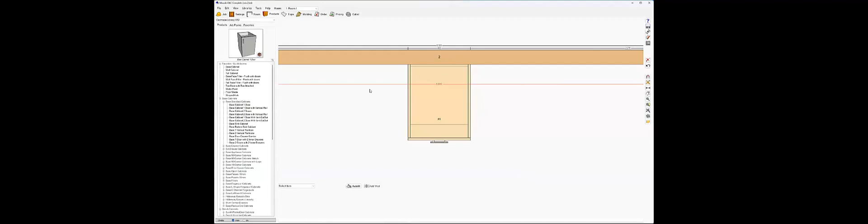While we're waiting for that, I'll go ahead and talk about these 12.1 inserts.

So if we go into libraries and inserts, you'll see in the insert library we've shared some of these things out recently. You'll see that there's now bin options for the Wesco Pull Boy and also the Hafele Hailo Euro Cargo range, brand new options we've created some nice models for. As you can see in the Antaro range, in the drop-down menu, you'll see the Blum Antaro, Wesco Pull Boy range, the Legrabox and Merivobox options. So quite a few new bin options there.

We've tried to list it out based on the cabinet size, so you'll see 300s, 400s, 450 — that's referring to the overall cabinet size you'd need to accommodate that bin. Then the capacity of the bin is written at the end of it. So the one I've got highlighted here is the 2 by 26 litre buckets, and then you've got the 2 by 32 litre buckets as well in the 450 range. So within those options you'll be able to accommodate different choices. Very easy to use.

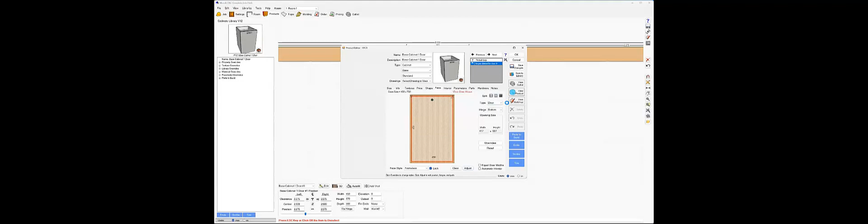If I go ahead and look at this cabinet here, I've got the cabinet set to hinged on the bottom, and then set that to a door. I've just gone into adjust and deleted my hinges, so that way I've got a handle at the top there and nothing at the moment inside the box.

What we want to do is go ahead and go to the interior, and now we can go to the inserts by clicking on the opening and clicking on inserts. You'll see you've got the bins Wesco Pull Boy range, and then you can go ahead and drag out the appropriate ones. I've got a 450 wide cabinet, so I'm going to grab the 450, 2 by 32 litre buckets, and drag and drop that in. Now that's pretty much all you would need to do at that point.

What you can see here, if we look at this in high detail mode, you'll see we've got the front bracket drilling coming through onto the back of the door face, and also the side bracket options onto the side of the cabinets. So both of those options would come through automatically.

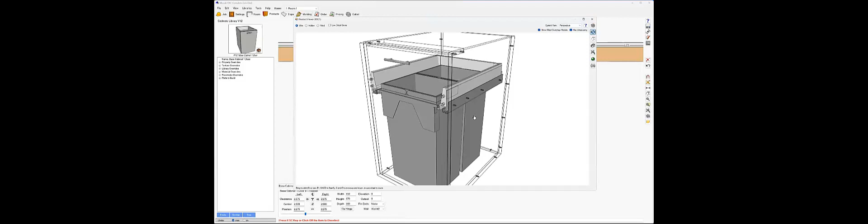Now, if you do want to lift your bin up higher to sit higher in the cabinet and have a bigger space underneath, the best way to do that would be by using an insert separator. So I'll clear this out and we'll go ahead and split the product and change that type to a separator. I can click then and nominate the amount of space I want underneath the separator — say I wanted that to be 50 millimeters, for example. I can click then, and I've got two separate insert areas that I can utilize.

In this top section here, I could go ahead and drag that product out, and what you'll see is the drilling and everything's moved up that extra 50 mil space I accommodated. So if I wanted to bump that up, you can see I've still got 67 mil top clearance above the bin drawer there. I'm going to go ahead and still move that to 100, and I would still have 17 mil of clearance above that then — that's about as high as I probably want to set that option. But that does give you those choices to run through and set that to what you're after.

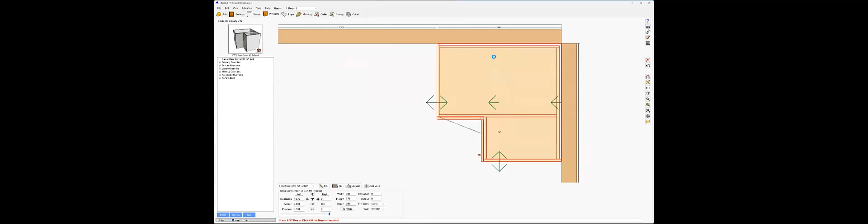I can see Mark's asked a question here about whether there's a way to add clearance to corner cabinets, both right and left walls, similar to the clearance for blind corners. I guess there's no way of nominating separate clearances if that's what you're asking. If we go ahead and look at a corner cabinet here and drag and drop a corner cabinet into the section — at the moment, as you can see, the one clearance option, if we go into the parameters, we've got the unfinished back recess — if I was to zero that out, you would see that would zero out on both sides. So it's not one or the other, it's just both sides.

In the situation, I guess, where this maybe was an invisible wall, because maybe that's going to be a return, breakfast bar or something like that, where you're going to see the other side of that. It may be a bar panel or something like that. I can understand where you're trying to achieve there.

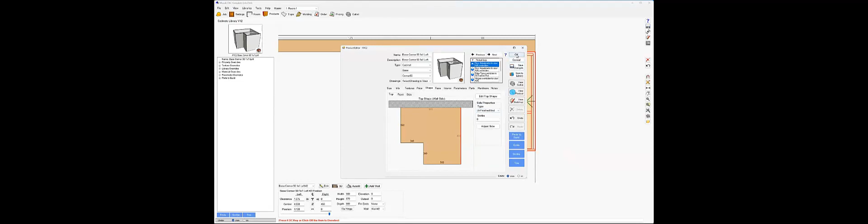So what you could probably do in that situation, if I go ahead and make this 16.5, just to bring that clearance back, you could probably change what the part type is there. So if it is a back, then we are going to get that 16 mil scribe on that back. But if we change the part type, and let's just say we make that, for example, an end, and I click OK, that's kind of one way you could roughly achieve it, because now that's classified as an end of a cabinet, not the back.

So that would be one option. You would just need to accommodate sort of how you would want that join to work then, because being an end, it's going to go all the way back to the wall. But you could click on the section there and go adjust, and then you could take off a right edge adjustment like 16.5 mil or something like that to be able to pull that back in line with the other back. And then you'd probably need to do the similar sort of thing at this end of the product as well.

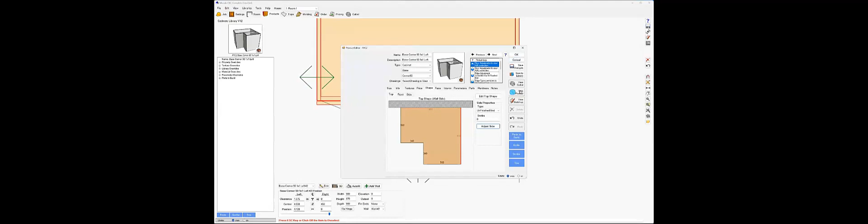So we had a look in the 3D view there. At the moment, they're both overlapping, thinking that you probably want to miter two ends together. But in this situation, same deal. You could click on this one, adjust, and then you could take your material thickness away from that edge as well. So then looking at that, you sort of come up with the right option. You've got the two ends there meeting in the back there, and that's giving you the adjustment on one side where you've still got the clearance there, but not on the breakfast bar side.

Hopefully that's kind of what you're after. Hopefully I've sort of answered that one clearly, but yeah, just drop me a comment if you want to sort of clarify any of that a little bit further.

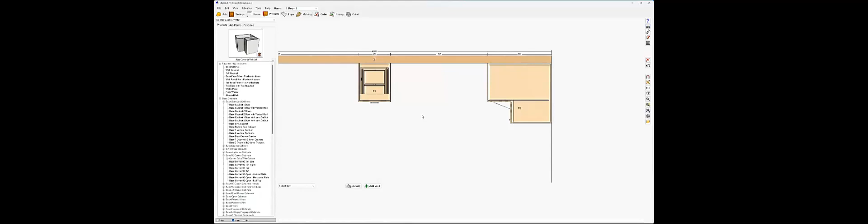So coming back to some of the other changes in 12.1, if we jump into libraries, and we're going to go down and take a look at the fasteners. So I'm going to go into the hardware library and into fasteners. One of the changes that I wanted to mention was that in the CADmate screws, one thing that you could do an update on your side would just be the drilling depth, what it's linked to.

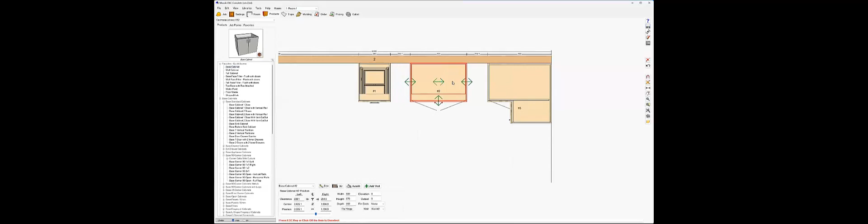Previously, this was linked to an unfinished end. So right now you can change that to part TH. So the value part TH will look up the current part thickness. So, if you do happen to change your end thicknesses, from say 16 mil on one end and something on another end, what I'm trying to point out here is I click on this one and maybe make this a finished end. And let's say then I go to my finished end and I've nominated a different material thickness.

So right now that's on 18 mil. What we'll notice in prior to 12.1 was that your screw holes were still based on the unfinished end. So they were not going deep enough on the finished end in the different material. Whereas now with that new formula, it'll reference whatever the current part is, not just a particular part type, which is really useful.

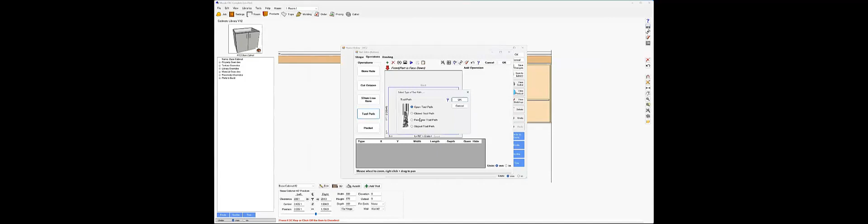That's a really useful one as well, just in general, if you were trying to add a cutout to something, like if I was to add a cutout to the bottom of this cabinet and I was to go into my edit operations, and let's just say I go ahead and I'll do a perimeter toolpath and I might just offset that in, let's say, minus 50 mil all the way around. Now, if I was wanting that to cut through, what I could do there in the depth, I could just go ahead and nominate the calculator and just type part TH. So as soon as you type part TH and you press test, it's now referring to the thickness of that part. So that part in there, it's 16.5 mil thick at the moment based on my material.

But I can go into edit there and I could change that material to something else. So for example, I'm just going to pick a 19 mil material.

And when I come back in here and go back to my edit operation, you'll see that's updated to 19 based on that current part thickness. So it's useful to know you can nominate that really easily now with part TH, just like part L for part length and part W for part width. Part TH would be the part thickness, so it's really easy to look that value up in a formula.

While we're talking about adding operations, a question came up recently. One of the people asked on Facebook about anchoring and how the anchoring system works, so I just wanted to point that out. At the moment, let's delete this one and add another in. We'll just do a closed toolpath.

Now at the moment this point here is a certain distance away from the left, right? If I was just to say I'm going to make that 100 mil, and click on this one and make that also 100 millimeters, just for nice round numbers, and do the same here - let's say 100 millimeters from the front, and the same here, 100 millimeters from that side. Now if you're trying to keep these particular points exactly 100 millimeters away from this edge, you want to make sure you change your anchoring value, because if you leave it on the middle, it's scaling as the part grows or shrinks in size.

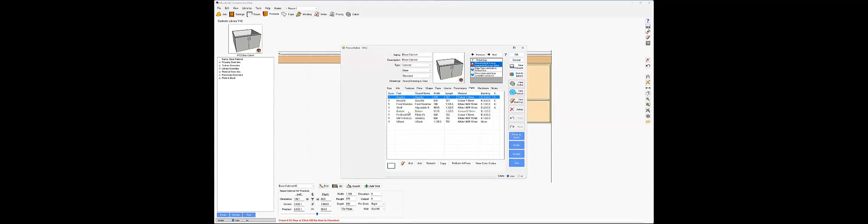So just to show you that difference again, if I now go and make that wider and deeper again, and we go back into that bottom, edit and edit operations - what's changing now is it's keeping, you can see these values, they're not 100 mil anymore, they've gone to 122. So it's scaling now with the product. It's not keeping a fixed value off the middle of the product, it's now scaling in relation to it.

So as you grow, if you were to grow that by 100%, your scale would be 100%. If you were to grow it by 50%, that would scale according to the factor of whatever percentage that was to begin with. It's much easier to understand the anchoring when you point things to the opposite corners rather than off the middle. But if you want it to scale proportionately as the product grows or shrinks, then anchoring to the middle is fine.

But if you wanted to keep fixed values, anchoring to either point is a good one to know.

Another point on the toolpaths there, when you assign a tool, say a 10 millimeter compression cutter for example, that tool is actually running around the middle of that line, which means you've got to accommodate for the tool radius, which would be on the outside of that line. So a better way, if you're trying to do a cutout rather than just assigning the tool itself, would be...

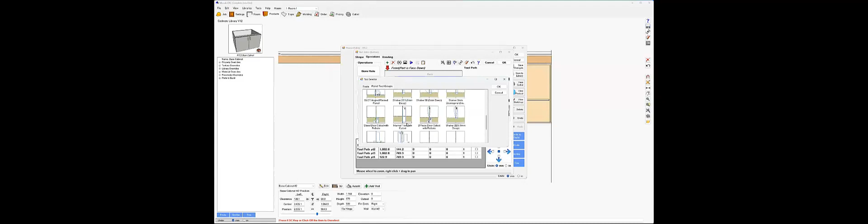...to go into your panel tool groups and have a panel tool group assigned to put an internal cutout. We've got one in our standard library there, an internal toolpath cutout, that nominates that standard 3-wing compression cutter, the 10 mil 3-wing compression cutter. Then you don't even need to nominate a depth, because that particular toolpath has the tool going straight through the material without needing to nominate a depth. So a whole bunch of different information there that you can utilize.

I think utilizing your understanding of the relationship between tools and how they apply to a line, and the toolpaths and how they apply to a line, is definitely something worth investigating and understanding, because you'll definitely find that super useful.

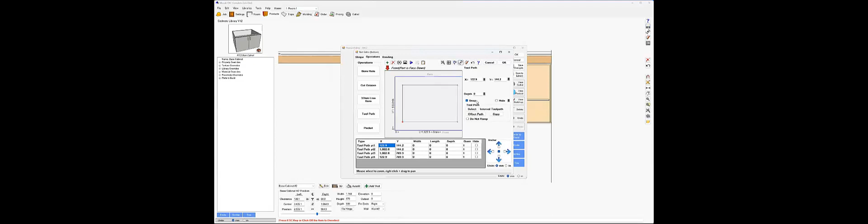Let's see, some of the other questions that came through on Facebook - Brock was asking about how to do corner pantries, the corner 45 pantries, and set the top and bottom to run over the product. I'll try and explain that one, at least my understanding of what he was asking. He was asking for L-shaped shelves too.

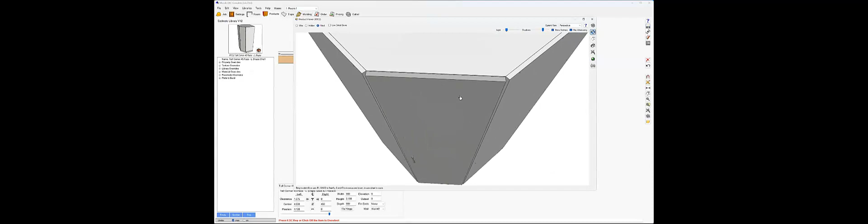So in our standard library under tall 45 corner cabinets, we do have a tall 45 face L-shaped shelf option. If we go into this product, by default, the way this one is out of the box, it's got the ends over the top, and a void at the back there, and the door is sitting between those. The door also has some adjustment values - you can see we've taken 12 mil away and we've inset the door 11.7 mil. If you're going to change all this, some of those values are going to change, and we do have the shelf shaped as well.

So within that L shape that you're after - I think what you were asking there, Brock, is that you wanted the top and the bottom of the cabinet to run over the ends and over the back. So I'll just explain how that change would look and how that would work.

We go into the parameters here. The first thing you want to do is jump into select a new parameter, and let's go down to the ends value. There's an option here that says long bottom at unfinished end, so I'm going to click OK on that one and change that to yes. I'm going to go back in there and go to the long top at unfinished end, and change that one to yes as well. I'm also going to then go into the backs area.

What we're going to look at is the relationship between the back and the top of the cabinet, and we're probably going to change that to case depth, and the relationship between the back and the bottom of the cabinet, we're probably going to change that to case depth as well. I'd probably take away my recesses at this point - you might want to leave them, up to you. But if we have a look at that now, what we've done there is we've extended the top over the ends and the top over the back to get that full top as you kind of wanted.

Now, a couple of things we'll need to do, because this was a modified part, and as you can see, this relationship here is what I'm sort of looking at fixing now.

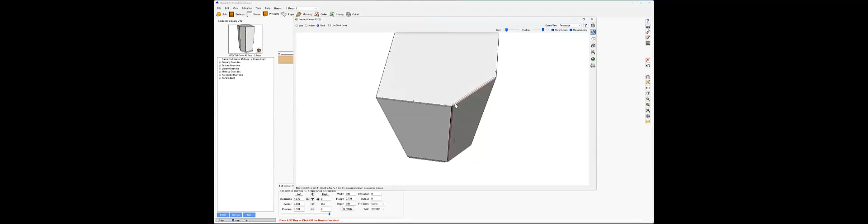Now when we go ahead and look at the 3D option here, you can see we've still got that top, the door that's inset at the moment. We can go ahead and click on the face and adjustments, and take that inset away. That way it sits forward, in the correct location there. And that's really what you're after.

You're talking about putting your top all the way over your ends and your back, and then having your door in front of that. Of course, you could probably then go in and go to the shape, and maybe you want to make that an applied door. Maybe this has got end panels on both sides, so we can just do an applied end on both ends. When we have a look at this, we can see we're getting that applied door option there. And that might change things as well, depending on how you want to build this. But yeah, there's a couple of different options.

I didn't mean to do that as a back. That should have just been an applied end. And that would get me a better result there with my shape of my cabinet.

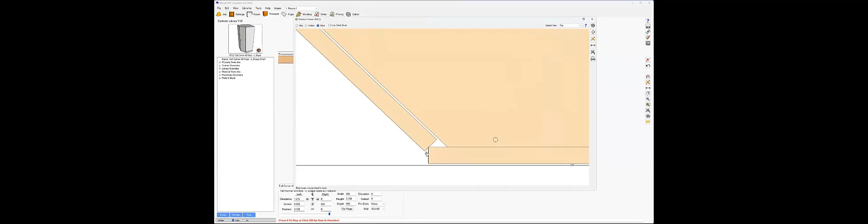And then if we look at this from a top view looking down, you'd probably want to make some adjustments to the doors and these overhangs, depending on how you wanted this to work. Some guys cut that back on an angle. Some guys would bring this out further and then drop your door back in, so your door kind of meets at that point there. And there's easy ways to do that.

You can click on that end and then go adjust, and then you've got left and right edge adjustments there. So I could go to this left edge and add 7 mil or something there. What's going to happen is that's going to shoot that end forward, and then I'll just take a bit more off that door to pull that back. So I'm trying to get those points to line up to a certain extent.

You can either click on the section of the face and adjust it here left and right, or you could go to the face, click on it and go to adjust, and then continue to adjust the amounts here. So if I wanted to take that, maybe I'd go to like -17 or something like that, left and right, and that's going to get me pretty close. I'd probably go a little bit more, maybe -19, and maybe that end can come out to 8 mil instead of 7. So you can play with your adjustments to get that looking the way you want it.

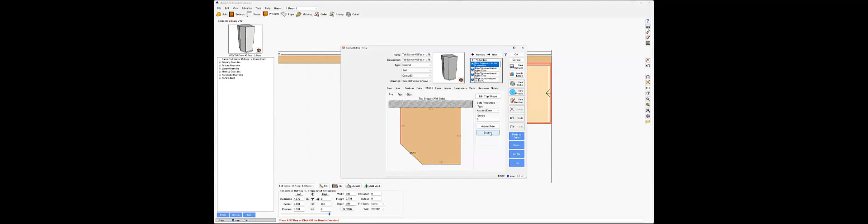It's pretty straightforward. It's just a case of building that the way that you're after. But I'll just click on and go through and put all those adjustments on there. And then once you've got that saved, you can put that back into your library. That's fully parametric, and then you've got a nice gap between the parts there. And then you've got your end panels on both sides.

So that's really probably what you're asking there. The top is over the ends of the cabinet. It's just that we've got an applied end on that now, which is totally optional. You could go back to that being just a standard side if you'd like, but hopefully that sort of covers and explains what you're after there.

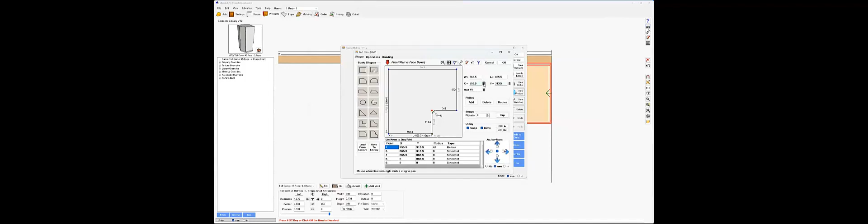The ends or the shelves have been shaped. So if you go to the shelf itself and go to edit and then edit shape, these have a custom shape on there, and they've got some parameters there that are referring to the overall side of the cabinet, and then taking away the shelf recesses and things like that. So if we look at the parameter value, if you wanted to change the depth of either of those ends, it would be by changing the left or right end depth there.

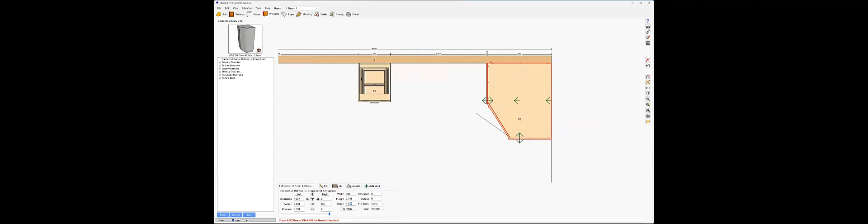As you grow that cabinet, your shelf will change with it. So say I go 1 meter this way and 1 meter that way, and go back in and look at this product in 3D, you can see all my shelves have grown appropriately with the cabinet. All those changes I made for the doors and everything have also stretched as well. Hopefully that answers your questions there.

We had a question from Matt in the States about how to update versions, like from version 10 to version 12.1. You can get your update straight from the Mozaik forum. You can log into the forum by going to your help menu and then down to Mozaik forum. You can register for the forum and download from the latest software updates area. No, you don't have to update all the different versions in between. The latest updated version for 12.1 will include all previous updates as well, so it's nice and easy.

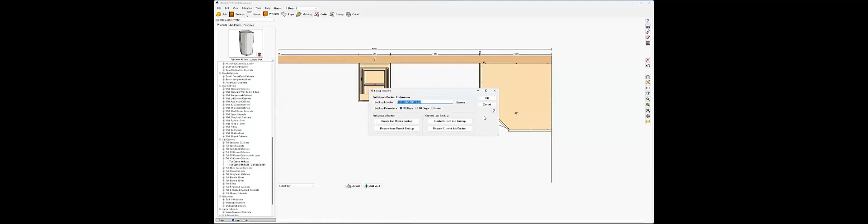All you really need to do is go to your C drive and back up your Mozaik folder, creating a full backup. Right click on that, copy and paste a full Mozaik backup folder, maybe even call it V10 backup version, and save all of that. You can also do it through Mozaik itself - go to Tools, click Backup Restore, choose a backup location, and click create a full Mozaik backup. That's another great way of doing it. It's a nice option to do that and then download the latest 12.1 update and run it. Obviously close Mozaik first, but it's fairly pain-free and easy as long as you create your backup so you can restore if needed. You should be pretty safe to jump from version 10 straight to version 12.1.

Noelle's asking if the Euro cargos are the same one here in the States. I'm not 100% sure if they're the exact same, but I believe they are, because I think all of that Hafele range comes out of Europe anyway, so they probably supply the same. You could check them out in the options we've supplied and compare. Go into inserts and come down to bins Hafele Euro. Hafele, depending on how you want to pronounce it, is just the local supplier here - that might not be the case in the States, they might come from a different provider, but the products themselves should be fairly universal.

From what I've seen, it was pretty hard to obtain the specs for these ones, but we worked through and found them. We were able to get a SketchUp model and then dimension off that model, thanks to some helpful people at Hafele. Eric's sharing the specs we've utilized too, so you can go have a look at them. Noah, you're saying Hafele is the provider over there as well. I'll get Eric to also share the SketchUp model we dimensioned these on, so you can compare the two. We've also got some screenshots in that folder that you can share in the chat, with just the dimensioned versions on them, so that way you can compare. But the model number itself should be fairly universal everywhere in the world.

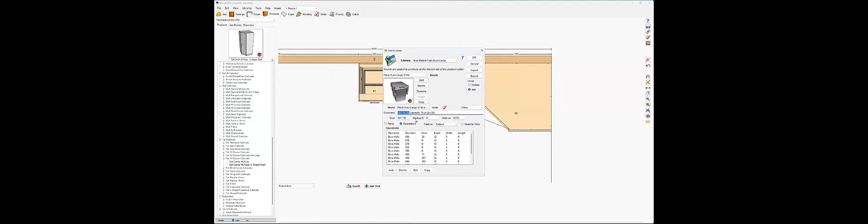Lisa's asking about the spice pullout for a 150 wide cabinet. We don't have one at the moment, but happy to add it in - we're actually in the process of adding these. The hardest thing with any of these is sourcing the actual models and getting the specs. So Lisa, if there's one in particular you're after, just send us a note to say what the actual particular one is. If you've got a link to it, that would be awesome, and we can try to get in touch with Hafele and ask if they can provide us with a 3D model, because if they can, it makes it easy for us to add that in.

We've been working with various companies to do that sort of thing too. I'll give you a bit of a preview here - hot off the press today, Jason's been working on adding in the Nova pullout range. So the Pika system, or PEKA, also popular throughout Europe as well.

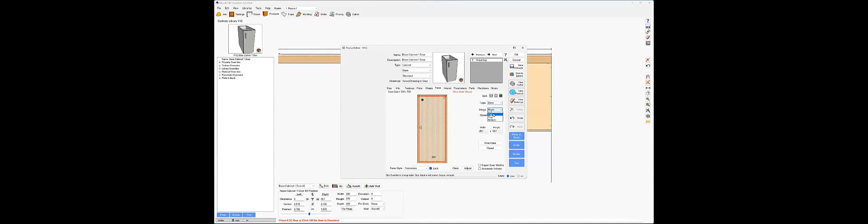We can go to clear there, and same deal, I would just set that to a door, hinged bottom, and remove my hinges to set that door up. Then when we go to inserts, we'll be releasing these as well - that's on our list to do today. So you'll see in the list here, there's a Nova Pika pullouts, and a 150, which is the 150 spice rack, I guess, from Nova.

So it's much easier now in 12.1 that we can add the front drilling. It makes this really possible for us to share so many of these things. So yeah, definitely plan on switching the Aventos and Le Mans to insert libraries as well. Nova has also been kind enough to share the Magic Corner, which is another popular one. We'll be adding that in as an insert option too.

So there's a huge list, especially bin drawers - there's a crazy amount of bin waste systems out there, and we've been trying to source everything. If anyone has suggestions on things they want added, we'll just keep working through them and sharing them as we create them. So yeah, definitely the Aventos systems.

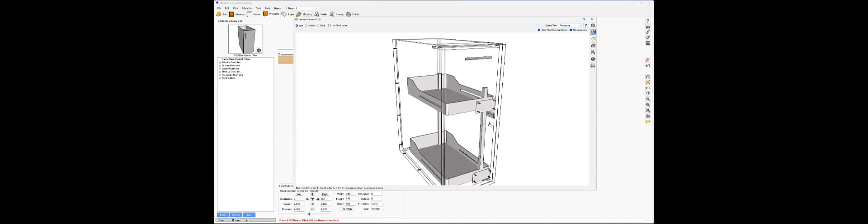Speaking to the Blum rep recently, he advised me they're recently going to be changing - there's some new Aventos systems coming out too, ones that are fully routed and embedded into the side of the product as well, so they don't take up any cabinet space. There's some nice new stuff from Blum coming, and we'll be on the front foot adding that in for sure.

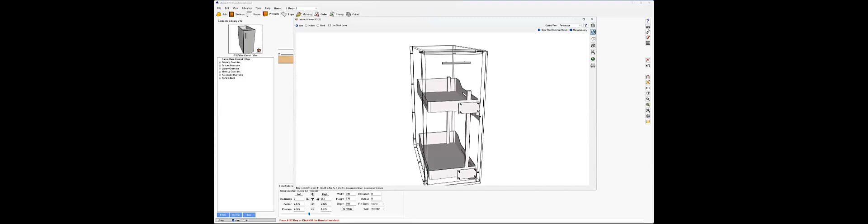Michael's asking, is there a way to bore holes in the cabinet back butt join method so they are evenly spaced - add in, remove when stretched, reduced in size. So you're talking about screwing the back into these holes here, the holes along the back edge of the product.

Because if I was to go back into base - okay, I know what you're talking about now. Let's just drag out a standard base cabinet, and I'll make this wider. So I think what you're saying is that as we get wider, we're still remaining on 3 holes as opposed to adding multiple holes at that point.

Yep, cool. So at some point, if we make that a bit smaller, 3 holes is going to be suitable, and then at some point you're probably going to want to change to 4, and at some point to 5. It's easier to add going from 3 straight to 5 than it is going from 3 to 4 and then 5, but I'll explain why.

If we jump into the fasteners area - say we go into libraries and hardware, then into the joint templates, and look at the CADmate screws method. The option we're looking at there is a joint from the bottom to the back. The factor we have to work around at the moment is that you've got options for 4 locations by default, right?

So location 1 is set 50 millimeters in from the left edge, location number 2 is set 50 millimeters in from the right edge, and location number 3 is set in the center. That's just out of the box how it works, right? Location number 4 at the moment is disabled, right?

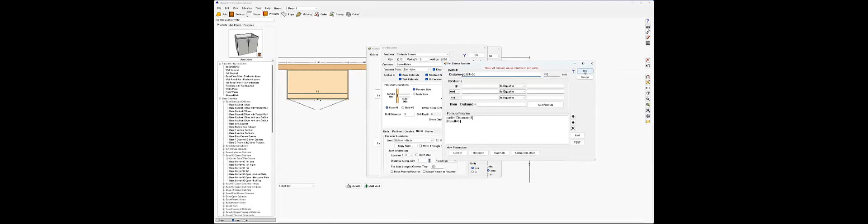Now let's just press OK there, and we'll save that and look at the change. So I open up this product. It's over 800 long, so we're going to get that extra hole. So we can see that's the one appearing here. I'd probably also want to change that to, rather than a quarter, I might want to increase that.

Brock's asking, are you going to share this? Yep, definitely, man. We'll share this out as we go. Afterwards, we'll share the recording, no problems.

So what I'm referring to there is that's the first hole that I've just added in. And we go back in here and we take a look at that formula again. And I look at the joint template and we jump into the CAD screws one and we go back to that option, and we'll go to the bottom to the back and we'll look at the fourth hole. We'll go into the formula.

Let's see if I change from part length to part width. Let's see that move. All right, so as we open this back up and go back to 3D, that now looks like it's a quarter of the way in, right? So we're referring to the width of the back as moving across this way, and the length of the back coming up this way.

So I guess the first thing you need to know is what part it's taking that option from, right? Because it's not coming from the bottom, because the bottom is the part that you would maybe think it's referring to, but it's picking that up from the back. So when we're saying part width, it's the part that it starts as. So it's a back, and I'm looking at the joint between the bottom and the back. First thing I always do before you do too much is just dive in and maybe just do one and check where it's referring to. So that way you can start on the right foot. Otherwise you sort of chase your tail the whole way through.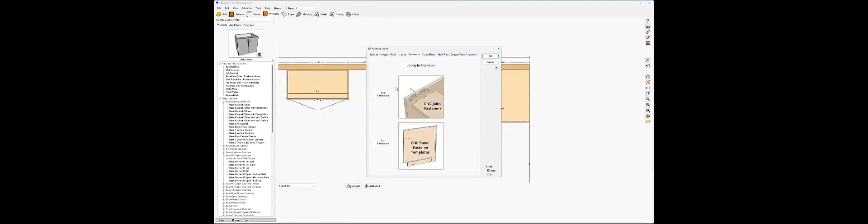So now that I've got that right, I go to libraries and hardware and back into the joint templates, and let's go to the cab screws one again, and we'll go back into the back to bottom and we'll look at the third hole.

Now the third hole is just at the moment fixed from the center, right? I'm going to change that to from left, and the distance - maybe I always want that to be on, so I don't need to say joint lengths greater than. Or maybe at a certain length, maybe like 200 long for that joint, I probably want it to go to 2 screws, so at some point I might want to turn that off, which you can easily do. But above that, I'm going to say by default, if I'm looking at making this in the center as a default rule, I'd say that same part width divided by 2.

It's not case sensitive, but I'm just in the habit of typing that in capitals in that format. Doesn't have to be though. So first of all, I've got that, and I'm putting it in the middle by default. And then I'm going to say, if the part width

was greater than or equal to a certain size - going back to that 800 value I mentioned before - then rather than it being in the middle, I want it to be the part width divided by 4 plus that 50 millimeters I wanted to bump it in to allow for the other screw.

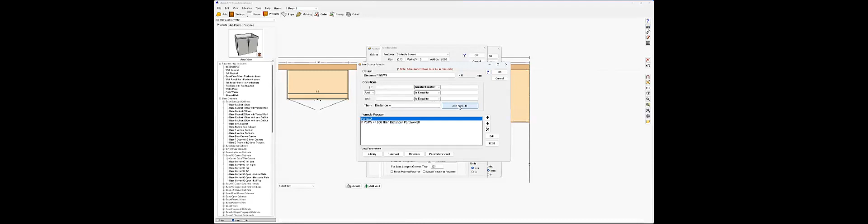So then we'll get out of there, hit okay, and jump into this one and go to the view option. Now what you'll see here is that I've got my screws in from the edge. Probably need to adjust that a little bit further to get that exactly at a quarter.

But what you'll see, as I reduce this in size, at some point in between 800, it's going to drop back to just the one hole in the middle. And then as I go over in size, I'm going to get my 4 holes. If I've reduced it right down to under 200, I'm going to get the extra one, and maybe you'd want to put another hole in the middle there. That's where you'd need to introduce another template.

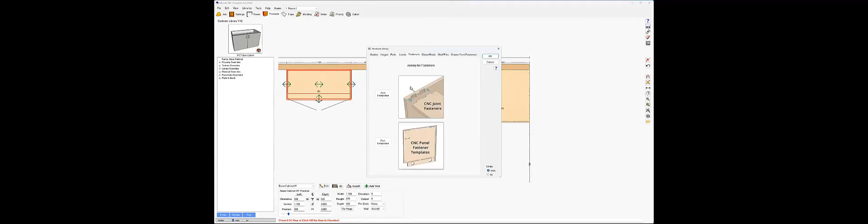So if we went into the hardware library, to go above 4, it's just extra templates. So we go into joint templates here, and if I was to look at this cab screws one - you could do a save as, but it's probably easier just to add a brand new one. But if I do a save as there, let's just call this

back holes, and we will go ahead and maybe turn all the other ones off. I'd probably go through, just so you're not doubling up with all of them, and disable all the other ones. I'm not going to waste too much time doing that now, but you can see how I'd go through and just disable everything that I don't want this to be.

And then on this particular option, now my location 1 is going to be the 5th hole, location 2 would be the 6th, location 3 would be the 7th, and location 4 would be the 8th. Same deal - I'd need to put rules as to when they turn on and where I want them to be placed. So just to show you, let's just do the first one.

Location 1, that might just be in the center, and that might only come on again when above 800 or something - maybe even more, maybe it would go to a meter when you want that to turn on. Again, you can create that rule, and I'll go ahead and say in my job parameters under the fasteners, I'm going to add that extra option on.

And then we'll go into this one here and take a look, and you'll see that we've got that extra hole. So definitely achievable, but a bit of mucking around to get it to do what you might want it to do when you start looking at adding second, third, fourth, fifth holes as you stretch the cabinet wider.

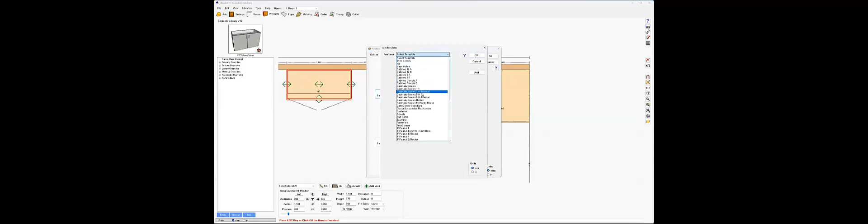Cool. You can also base that on - if you looked at our original ones, and if you don't have a copy of these, let us know - because the way we originally had these set up was the 1 to 4 and 5 to 8 methods as well. So if you were to go from cabinet screws to the 1 to 4 and 5 to 8 method, that should automatically be kind of set up to do that for you.

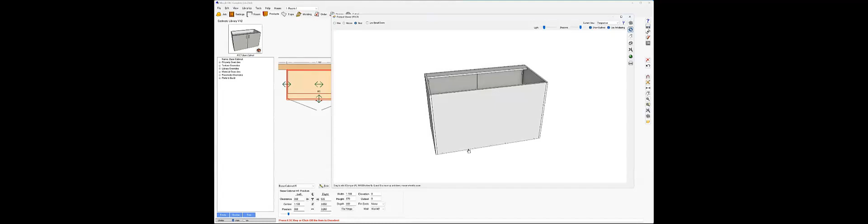So the complication here, and the reason why we moved away from it, is that it depends on whether we're picking up part length and part width based on a few factors, whether you've got internal or external backs, and other things that come into play. So depending on your construction method, that might need to be the internal option for those particular ones, and then you're going to get a different result again on the placement of those.

So yeah, there's various reasons why we kind of avoided that. I think what I'd probably like to see would be an option for us to just refer to joint length, and maybe expanding - having Mozaik expand that option out to 6 or 7 or maybe 8 or so screws that we could do per edge. That way it's a lot simpler. But at the moment, yeah, certainly achievable, but a bit of work and a bit of mucking around.

Someone asked about setting up Peanut fittings connection. Same kind of concept, really.

You're in the hardware joint fasteners area, and the Peanut options are already listed in there. I'm not overly familiar with that particular brand, but they're already set up with default settings, so you could tweak them. These do require a route, so that would be a route path that has already been created.

If there's something specific that you need to change, let us know what it is in particular that you need to adjust. But you can see you've got the adjustments there all built in, and then for them it's really just a case of nominating where you want them to be.

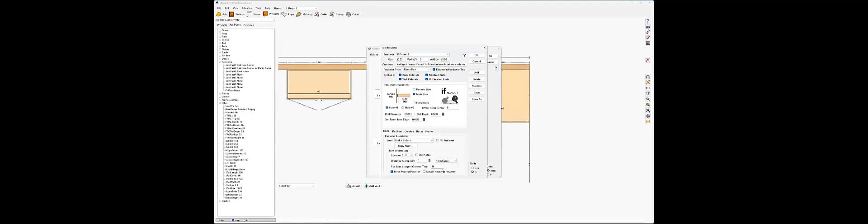If we look at the connection between a bottom and an end, it's set by default 1 inch in from the front edge, location 2 is 1 inch in from the rear edge, and location 3 is in the middle over a certain size. If I flip to inches, it's over 14 inches, it's going to turn on.

For us to utilize those, it would just be a case of nominating the appropriate one. You can see you've got a few different options there, so it would be a case of going through and turning on the options and nominating those.

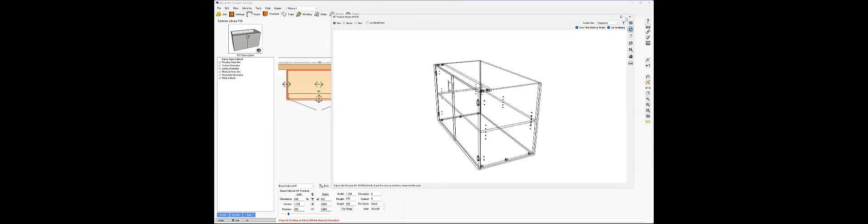That way you could utilize those, and if I was to open up this product, I've got those options there, and I can enable my high detail view just to get a clearer shot of that - you've got the hole with the route going through there. So that should work pretty well out of the box, just a case of whether or not you wanted to adjust the locations, which you can do in the hardware settings. Hopefully that clears up your question.

Has anyone else got any questions or things they'd like me to run through?

Brock asked how to add multiple runs on a closed toolpath in the operations tab if you're doing a range hood cutout. It depends on the cutout itself - it's a decent question, because it depends on how you've set up the route.

Let's go into this bottom, edit operations, and add a closed toolpath. Now if you've nominated a tool - we spoke about this earlier - if I just enter Part TH there, that's going to refer to the part thickness. If I was to nominate just a tool, say this 10 mil 3-wing cutter, then what comes into play is the values for that tool.

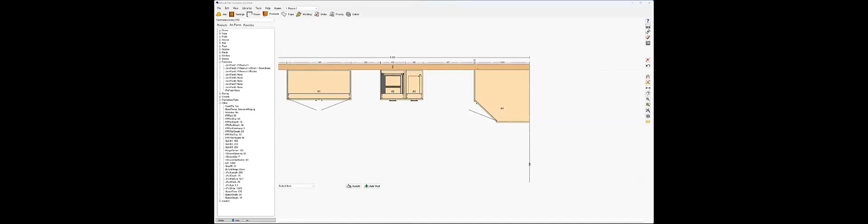Let's go into the optimizer - I'll just change my sharing settings here so you guys can see that. In the optimizer, if I go into Libraries and CNC Tooling and click on that tool, you do have a pass depth value.

If you wanted to do that cutout in increments of 5 millimeters, you could nominate 5 millimeters as your pass depth. Keep in mind, if you're using that tool for other things like cutting the parts out, that same pass depth is going to apply everywhere you're using that tool, regardless of whether it's a cutout or an operation like you're talking about here.

So that's one way you could approach it - you could nominate your pass depth, and that will automatically do it in increments of 5 until it gets down to the appropriate thickness. So for a 16.5 mil part, it would go 5, 10, 15, and then 16.8 in this case, because I've got a 0.3 value added to my through cut.

However, if I didn't want to affect my standard cutout and I wanted this to be 20 mil or something like that, whatever I wanted it set to, then I would do it instead as a panel tool group.

So if I looked at the internal cutout option, and this is probably what's by default assigned to your range hood cutout, that way you don't have to factor in the tool radius into anything.

If we come down to the depth value here, at the moment this is a through cut. So this is just straight away going to go all the way through.

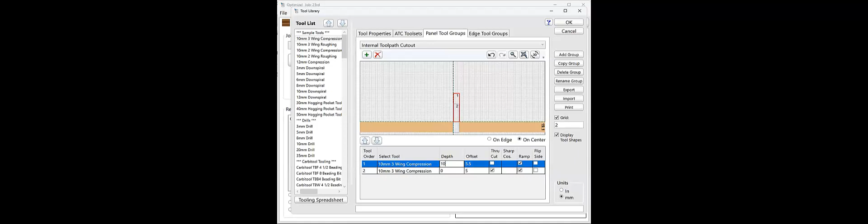Now if you wanted to do that in increments, what you could do here is just add another tool to this one. And I'd probably list that one first, and do the same thing. I'd have the same offset, or maybe go a touch oversized on the first one, maybe 5.5. And then the depth, instead of a through cut, maybe go down 10 mil deep on the first one, or 15 mil deep. Again, I can nominate what I want that to be.

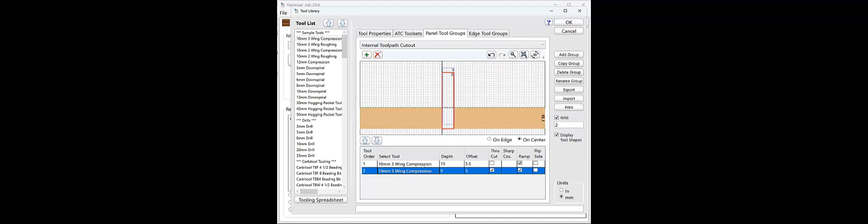But what I'm basically doing there is nominating that this particular tool is going to be first. So the order of the tool is important. That one's going to be first, going down 15 mil deep at an offset of 5.5 millimeters. And then we're coming in with the cutout tool. So just by adding those extra tools in, and you can have as many tools in that tool group as you like, you could achieve it.

So that would probably be the easiest way to go about it, I would say. Because then in your tool path, all you would need to do is nominate that particular panel tool group, and the rest of it would be automatic from there. So you just go into your panel tool group and nominate that internal cutout option, and now that's got the two tools as part of that panel tool group. That way, anywhere it's assigned, it's going to do that automatically without you thinking about it.

Michael's saying, I'm still in version 10, but the range hood cabinet parameters doesn't have an option for cutout from edge, whereas under panels it has been. Has this been updated on version 12?

Pretty sure Jason has gone through and updated that. Yeah, Jason's just clarifying that now - we updated that in version 11 and 12.

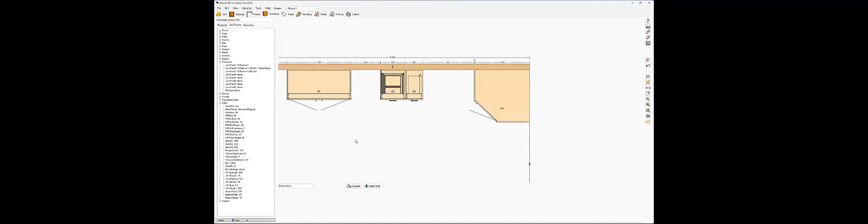So if I was just to go into products there and drag out a range hood cabinet, we have expanded that range hood cabinet range as well in version 12 too. So you've got your standard range hood cabinet. And if I was just to show you, that's the sort of one you've probably been using.

You've got the option to shift those cutouts. We've also made the duct box auto center unless you specify otherwise. But we've also added in ones here that have a division, so there's ones that have divisions where the hinges can slide inside that division. And then there's ones with cutouts as well.

So just to show you that one a little bit clearer, if I open that up - what I'm talking about here is we've got a front panel over this and then a cutout around the hinge, with parameters where you can control the size of that cutout and then the location of the cutout.

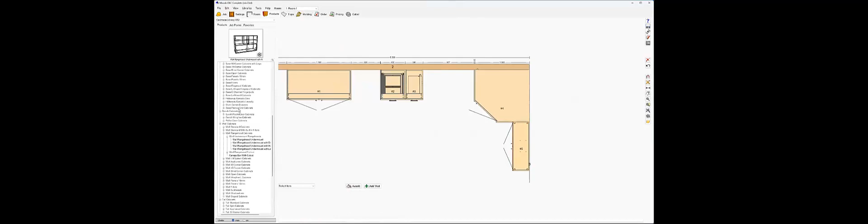So definitely worth updating to the latest version 12 library - a lot of things to take advantage of there, as I mentioned. And then we've got a different range for the pullouts as well, same kind of thing, the pullout but with a duct box too. So a few options in there to take advantage of for sure.

Some of the other questions that came through, we had Matt also asking about how to do a refacing job. Probably like what we try to do with the version 12 library of Mozaik as well is add in some refacing options.

So the way these are designed to work, you can drag and drop, assuming this is going to be hinged on the left, and then you could set your width and height. So like if I could say that I wanted this to be 1900 high or something, and then 500 wide, you would nominate your sizes, and you can go into that product and go to the parameters tab.

What we've tried to do here is make it easy for you to nominate these hinge locations. So I've got that at 100 mil, but you might go 96 or something to stick to that system 32 for your top and bottom hinge.

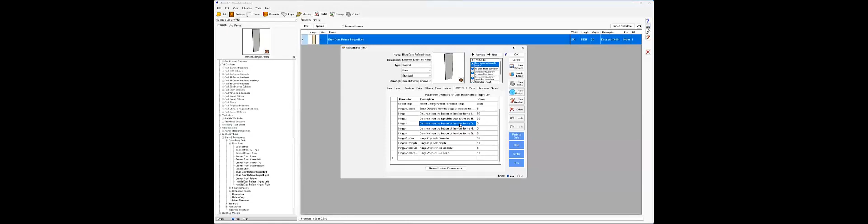Your third, fourth and fifth hinge are all based on the distance from the bottom of the door. So just to show you this in 3D, I'll stack these side by side so you can see it a bit clearer. As I add the third one in, let's say I want that at 700 mil from the bottom, I can nominate that amount. Next one, I might want 1400 from the bottom. And then I've got my hinges, because refaces are pretty much based around that, where you'd just be taking a measurement based on the door you're refacing.

So you don't typically want them centered or anything like that. It's really just you're measuring it and you're saying, from here to here, it's this size, just do that. That's kind of the way we've designed these products to work. You can change your cup hole diameter and depth, and your anchor diameter and depth, so you've got options there to make that nice and easy.

And then you've also got the same option for your drawer fronts. Rather than trying to make these overcomplicated, we tried to do this the same kind of thing, where you could specify how far in is it from the edge. So your first reference is saying, okay, from the edge across, how far is that? It's at 48 millimeters at the moment.

Let's just make it 100 to see that clearly shift. So you can nominate what you want that to be from the left and from the right, giving you control either way, so you can measure the drawer front you're refacing. And then your distance between your first hole - that's how far up from the bottom of the draw to the first hole. That would be the first thing you'd measure, and if you nominated that at 30 millimeters, for example, then that's what that is.

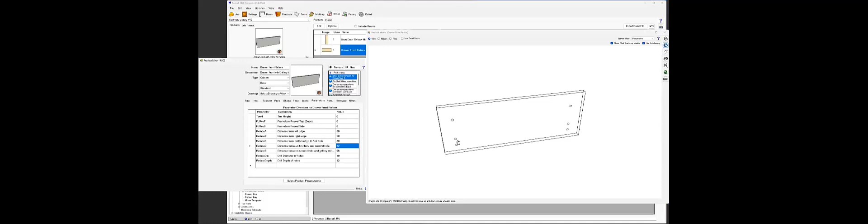You could also make this work on inches as well, so you could just go in there and type inches too. So if it was 2 inches off the left and 2 inches off the right, and maybe an inch and a half off the bottom, and then the distance between the holes - again, for most of these metal-sided systems they're typically based on system 32, so most of those are going to be like 32 millimeters, for example, and then 96 millimeters for the next hole.

And if you don't want that option, you can just set that to 0 and that hole will turn off - so if your drawer front wasn't high enough to support the gallery, you could just turn that one off, and that's nice and easy too. And again, whatever the diameter and depth of those holes are, you can go through and nominate those. But that's a pretty easy way to do reface jobs, where you can just nominate the overall size and drag and drop your products onto the order entry page.

So hopefully that will clarify that one for you, Matt. You also had another question about how you could create some sample doors for certain sizes.

You could use the same kind of order entry, but maybe you'd just go into your door list here, because if I wanted to make a shaker door sample size - and I think you were asking how that would be in inches - so I'd probably say, you said 12 by 12, so I'd go 12 by 12, and that's my sample shaker door. And then I could just go ahead and drag out whatever other door design I wanted and nominate that.

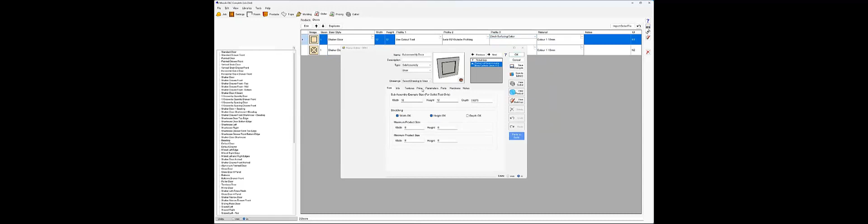You've got then your profile options across here, so you can go through and say, okay, what outside edge profiling tool you're nominating, or what inside edge pocketing tool you're nominating. So you can go through and settle your tools there as well. But you can also double click on that and go into the options here and nominate these things as well.

Otherwise, you could set that for the job and have it read from the job settings. Heaps of options there. You could also double click on those, or right click and go edit properties. And then I'm changing both of these at the same time.

So if I just wanted to say this was my pocketing tool, I could do that. I could nominate a pocketing tool, and then it changes across the board. So you could go through and have as many of these as you want, and then route them out, and that way you've got 6 or 7 sample doors that you could display for your customers.

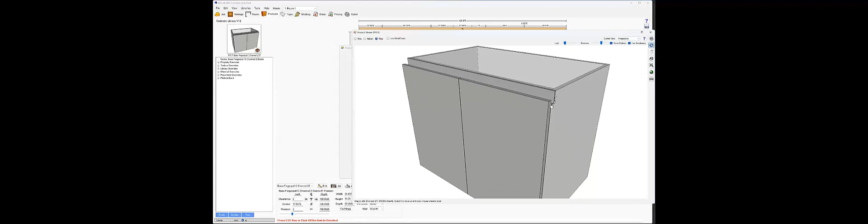Partitions on Gola cabinets. Gola is, for everyone else watching, the US version of what we call finger pull over here. So if I was to look at a product, let's drag out what we've got in our standard cabinet library - the base finger pull cabinet range. We've also got the C channel, which is probably closer to Gola because it's based on aluminium extrusion. Let's go into the product here - you can see we've got that aluminium extrusion, which would be the Gola option.

So I think what you're asking, Noel, is about if you wanted to drop a partition in there, how would that interact with that Gola range. We tend to avoid doing custom parameters for various reasons - we'd like the customers to have more control over products at part level, so we tend to just leave it as custom shapes.

So what I'd probably say to do is go into the partition, go to edit shape, and go to the load from library option. We do have a range in our library called the finger pull ends. Even though they're designed for left ends with various different sizes, I could grab that C finger pull left end option and that applies the cutout for me - that's probably the easiest way. As you can see, it's gone to the back because I grabbed the left hand, so I'd actually need to grab a right hand end in that scenario.

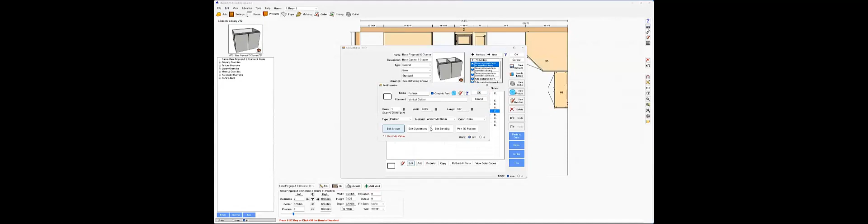So we go back in and load from library. Something to note there, Jason - we could probably add those in as a partition option too, would be pretty useful, just a copy of those but made to work with just the right hand end. A little bit confusing to know which one you're grabbing, but if we open that up, you can see I've got that cutout running around the partition, so that works really nicely. It's just a case of loading up that saved part shape, and from there you're just building your product out as you need it.

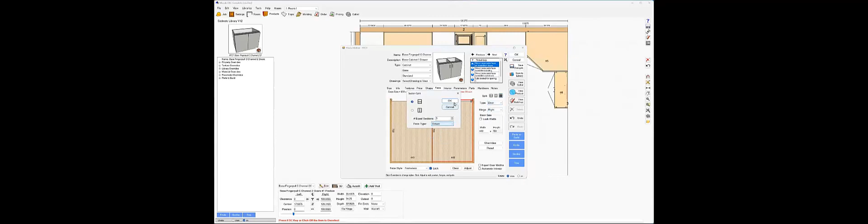So if you wanted to split that and this side was going to be a set of drawers or something like that, you can go ahead and build that nice and easy. You've got your Gola or finger pull cutout wrapping around that rail. Yeah, that would be the way I'd probably approach that one.

And you could adjust that too - like if you needed that to run up, you could definitely adjust it, because at the moment there's nothing above it. So I can click on that and go adjust part, go to my top edge there, and maybe add that 16.5 mil that it thinks it needs to drop down by the top thickness. That way I get that spot on and running up to the right spot. So yeah, that's how I'd go about that.

Can you show us how to make this panel groove parametric? Is that the back, like the back of a cabinet, for horizontal grooving? That's a good point.

We could certainly add in a horizontal version of our V groove door. That would probably be a good suggestion, because if I just make a tall cabinet, for example, let's go into the product library and grab a tall product. I'll make that a little bit wider.

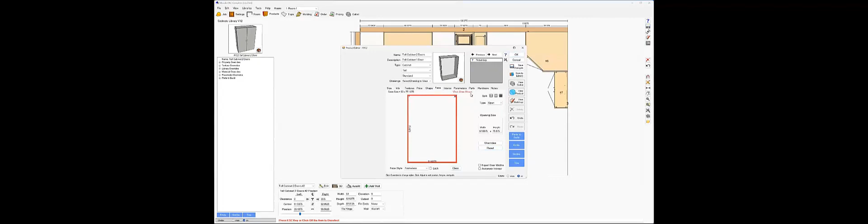Maybe you're going to split this into sections. So if I just reset this, maybe you're going to have a top section there that's in inches. I'll flick back to millimeters, more familiar, but go ahead and nominate that.

Maybe that's going to be a pair of doors. And then down here, we can split that. At the bottom, it looks like you've got maybe a couple of drawers or another pair of doors, and that's a lower height section as well. This middle section here is going to be open. Down here, I can split that into a couple of drawers or something like that.

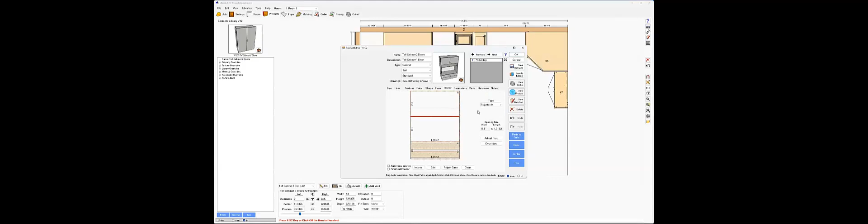Then you might want to go into your interior and start building that out, so you might come down here and make that a fixed shelf and center it, or flush it to the top of the lower section. Same deal up here, you might grab that and make it fixed, then flush that to the bottom of that next opening.

You might put a division and some shelves up there, whatever you wanted in those sections. But come into what that is at the back there. If you're trying to open that up, again, you might not have an end on it, and it looks like you don't in this section. There's various things you can do there to build that.

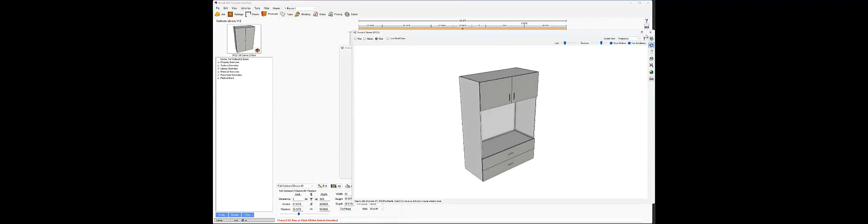But what I'm getting at is if you wanted a particular product on the back, you could insert a door, or you could add in the lines. In this situation, it would just be going to toolpath, open toolpath, deleting points 3 and 4, then having these points at wherever you wanted to start and end, nominating the depth of your groove and what groove tool you wanted to use. Choose the appropriate tool, that's your first line, then repeat for as many lines as you need.

So you could do that on a product like this. But I think you've raised a good point that if we looked at a door, if you wanted to make that nice and easy from a vertical groove perspective, we could add that in as an option as a horizontal choice. So we'll make a note of that and see what we can do there.

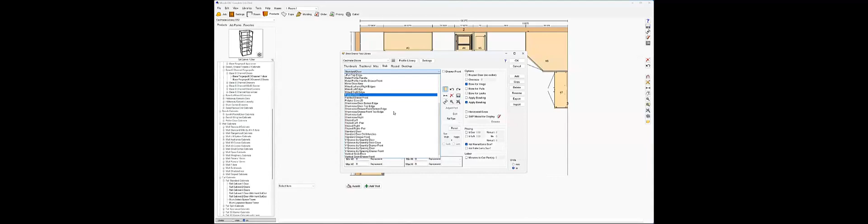Because if we look under the slab category, we've got the V-groove doors by quantity. These are options where, as I choose that door design, I can choose how many grooves I want, and we could make an option for a horizontal version of that. That way you could just drag and drop a panel in that situation too.

If it wasn't like that and I had separate products, then what I could do is go to my base bar back panel. I'd probably come down and grab a base panel, and look at a bar back panel. This particular one, again, we can position wherever we like, and our elevation can be at whatever position we need it to be at.

So I'm in inches again, let me change that, it keeps messing me up. Let's go ahead and set that elevation to 800. What I'm getting at here is that now with this one, we could go ahead and choose the door style for the V groove by quantity, and then on the parameters, you could choose the amount of grooves that you needed.

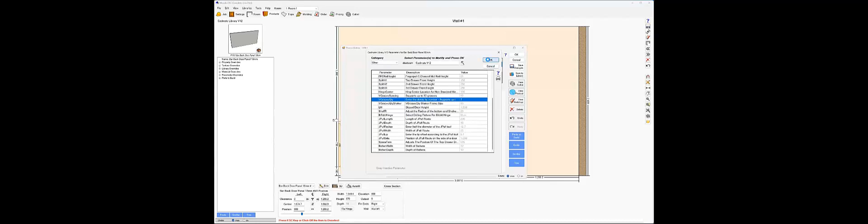So in this case, if I go into the other folder and come down to the V groove by quantity, I've got 7 grooves there. If I made that sort of 14 grooves, then I've got an adequate amount of grooves for that panel. And that would just be what you're displaying at the back there.

What I'm suggesting we do on our side would be to provide a version that can be horizontal rather than vertical. I guess you could always rotate that around, but I think it would be simpler if we approach it and set that up. So we'll make a note of that one. Thanks for bringing that to our attention, Suki.

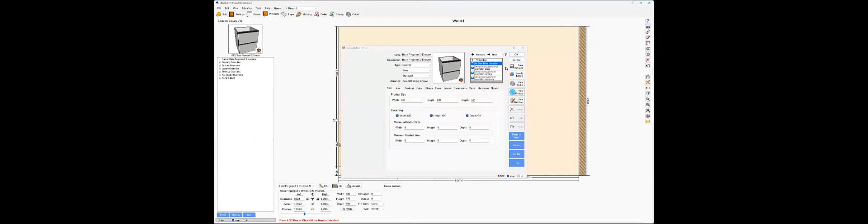Let's minimize all this. Let's take a 2 drawer. Does look like it has the ends to the floor. Actually, I've got the lines coming through on that one. Anyway, so I think what's probably changed there is that this has been maybe set to a frameless inset option.

So that way now the doors are inset inside of the options. So at the moment, you could do that, and then you would have to adjust your drawers, your reveals as well. Like if I wanted to shift the top down, I could go to adjust there, and then maybe take a minus value on that top one to bring that down, and then same deal here, just to sit that underneath the rail. But then that way you could get that sitting in the right sort of perspective.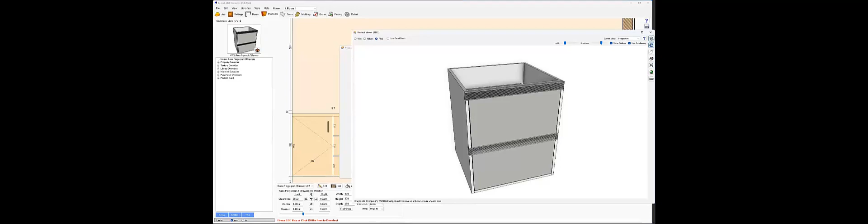It also looks like on that photo that they've got a solid end panel between each cabinet as well. So you might just draw one product and then drag a panel out of the library to have that solid panel between each one too. You could come down to the end panels and drag out the appropriate thickness one and drop that in between, then stack the next cabinet and do it that way. That's kind of how it looks like it's built to me, but it is pretty hard to tell from one photo.

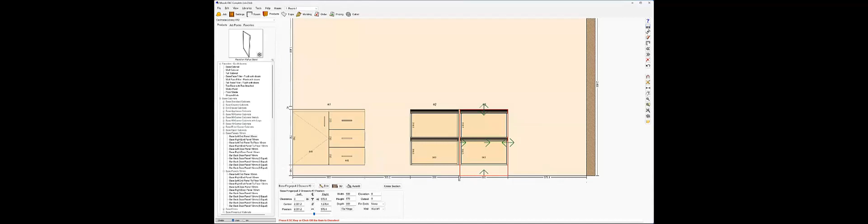Okay, so then Adrian said, how do I make a CNC tool profile to use the 1/4" compression cutter to cut out board, e.g. cut out drawers with grain matching above? So what you're saying there is that you're wanting to do your drawer fronts as one drawer, but use a smaller tool, or just stack the drawer fronts on top of each other and use that particular cutter. I think that's what you're asking there. So let's take a look.

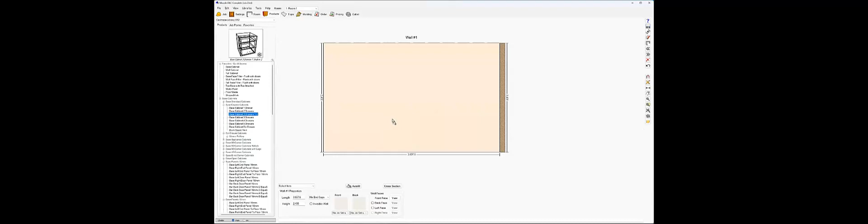Let's clear this out and maybe we'll just put a single drawer product in here, keeping this fairly simple. Let's go to the base drawers and do a 3 drawer, maybe even a 2x3, and I'll go ahead and match these together. So let's go into our options here in the info and we'll grain match that, choosing the vertical or horizontal option.

You can hit your question mark to look at the various options there, because it can be a little confusing since it's talking about which way it is on the sheet too. So when you're talking about that grain matching function, it's whether it's stacking that vertically or horizontally on the sheet. When you grain match them horizontally, it'll group them horizontally along the sheet. When you say vertical, it's grouping them vertically up the sheet.

So the other thing you want to do there is obviously nominate that you're using a grain material as well. So I'll just go Grain 1 18mm or something like that, for this particular purpose, and let's go into cut list and we'll go to that material and optimize these, and we'll open up the optimizer.

And we'll get that up here. Wrong one, oops. All right, multiple versions of that open.

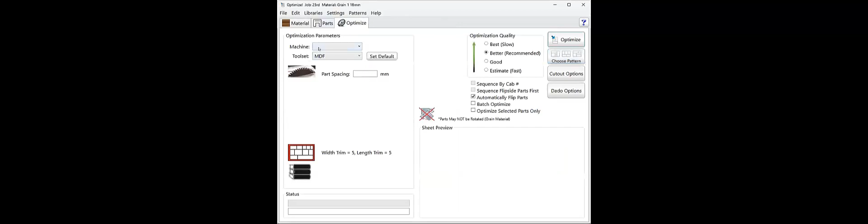So from there, as you go ahead and optimize that, I'm just going to set that to something and group that. So I've gone sort of shorthand grain being horizontal, but you could change that to vertical to go the other way.

I think your question is more or less asking about what the gap is between your parts. That's really coming from the part spacing. So if you're trying to get a quarter inch, I'm just going to say 3 millimeters there, and I would need to have a tool set that was based on that.

So if I go into my tool set options here, let's see, I'll make sure you guys can see that. Let's see, you guys see that tool set option okay? Yeah, cool.

So what I wanted to point out here is when we go into the ATC tool sets, you're probably going to want to add a tool set for this. You might call it your quarter inch grain match option. And then whatever your tool is that you're using, so if you're using like a quarter inch compression cutter.

Or whatever it is, even if it's a smaller one, like an eighth of an inch, to try and get that shorter, taking multiple passes at it, maybe that's the go-to. But whichever one it is, you need to make sure you're putting that in the right position for your tool, for where that is.

So if that was in position number 5, for example, then I would have to make sure that I've still got that set in position number 5 for my machine. Depending on your machine and whether or not the name or the number is valid, it really depends on your machine.

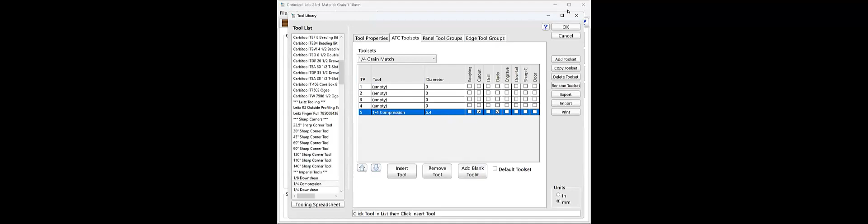But if I've nominated that one's a cutout tool and I've got it in my tool set, then what I'm doing here is nominating that I want that particular tool set here. And then I would set my part spacing to match that, so in this case, if I wanted to have my part spaced at an appropriate setting, like maybe 7 mil or something like that.

Just a bit over that quarter inch. When I run through here and optimize that out, then it's going to put these panels closer together to allow for that particular tool to do the cutout on these options.

Otherwise, your only other option would be to replace them with one face and then have single cuts between. That would be your other way to approach it.

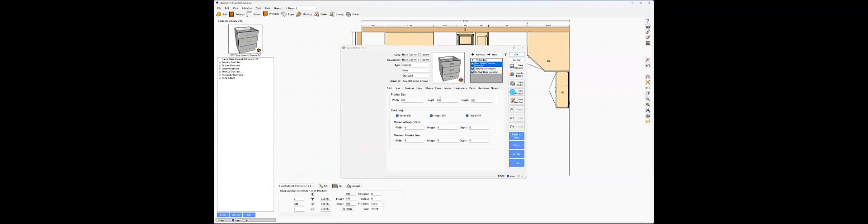So if I was to go back to Mozaik for a second, if I was to go back into this option here, let's say I go to the parts tab and look at the drawer faces. Let's say I go to that top drawer face, and I might go into edit there and change my quantity to 0, turn that one off, and then maybe go to my next one.

And I've got the bottom one there, so I'm going to go to the middle one here and go to edit and change that one to 0. And then I would have to go to my face value here, and I would have to adjust this bottom one up by the value of those two combined.

So obviously, I could go that 271.5 plus 180. I'll just calculate that quickly, we'll punch that into a calculator. I can bring one up here. So let's see, we'll go.

271.5 plus 180, that's 451.5, plus the gaps in between as well. So if I had a 2 mil gap, let's just go that I want that to be a value of 455, and I'm going to shift that up. So then I've lifted that up, right?

And now I can go into my parts, click on that part and go to edit, and then edit operations. And I could go ahead and maybe flip that over and add a toolpath, open toolpath, and delete these points. And then I could add these slices where I needed them to be, so the depth would be the thickness of the part.

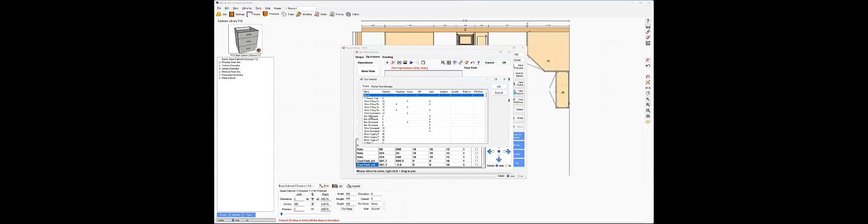And then I could go ahead and nominate a particular tool. So I could go find that particular quarter inch cutter, or maybe a 3 millimeter cutter if I'm trying to go for a 3 mil gap. That way I'm keeping it as tight as I can, nominating that at 271.5, plus maybe half of the tool, so maybe 273, might start at -1.

And then bring that one across to the same, and again just run that past slightly as well, maybe 601 or something like that. And then I'd do another one there, but that's really going to slice that through. You're not going to get the visual of it looking right because you're seeing that cut through.

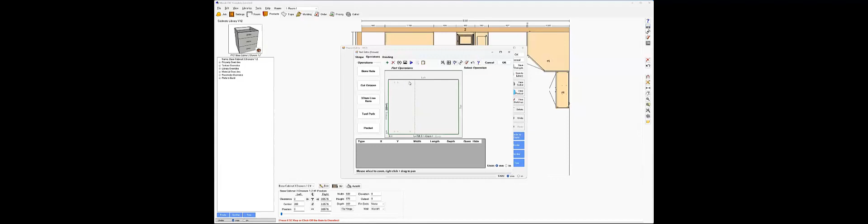The only way you might get that right is if you don't go all the way through on your depth cut. If I pulled that back slightly, so it's not going through, like 0.1 of a mil difference, I'm leaving a tiny bit there so I can see it attached to see how it would look. You could approach it that way, though it'd be fairly convoluted. In that situation, if you're really trying to get a perfect grain match, I'd probably just be doing that on a panel saw.

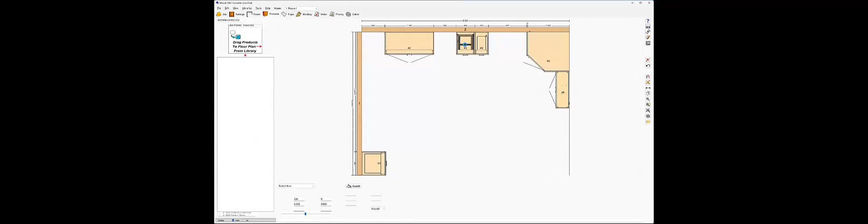Suki, your question there about Euro hinges - can we use them on inset doors too? Good question, I can't see why not. As Jason mentioned, we can click in here and make those frameless inset.

Just having a look there, going to high detail mode, we've still got the machining coming through onto the door face, and we've still got the machining on the sides. One thing you'll need to make sure you do is adjust - in that case, those values are still going to be fixed from the front.

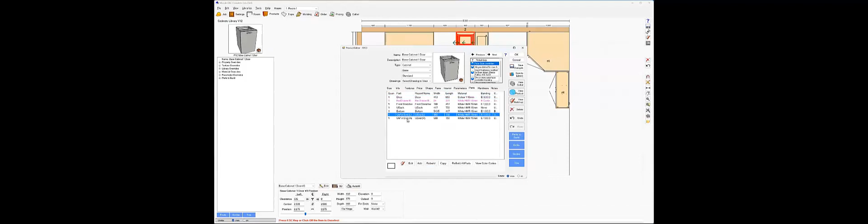Let's have a look at that actually, just to make sure I can correctly advise you. If I go to the end and edit operations, have a look at that one - probably easier on the right-hand end, so it's orientated the right way for us. This is the front hole here, it's 37 mil back. That's what it needed to be based on the front drilling, right?

So what I'd probably say to do is make a copy of the hinge you're using. You could have one that's inset 18 mil back, but also go into edit and the operations, and those values, instead of 37, add your value back as well - add that 18 mil onto that option and do that for each of the side holes. That way you've accounted for that value you're shifting everything back, so everything lines up.

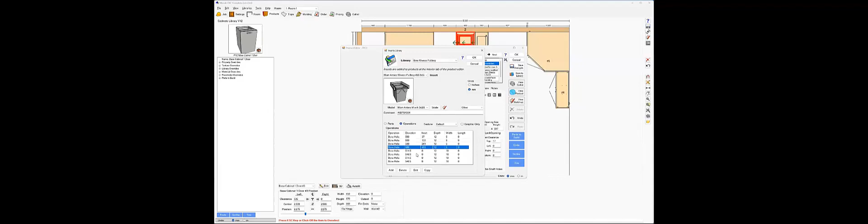So make a copy of it in the hardware library itself. Go into libraries, hinges, and go into whichever one you wanted, then press the copy button, make a copy of it, and make that an inset door option.